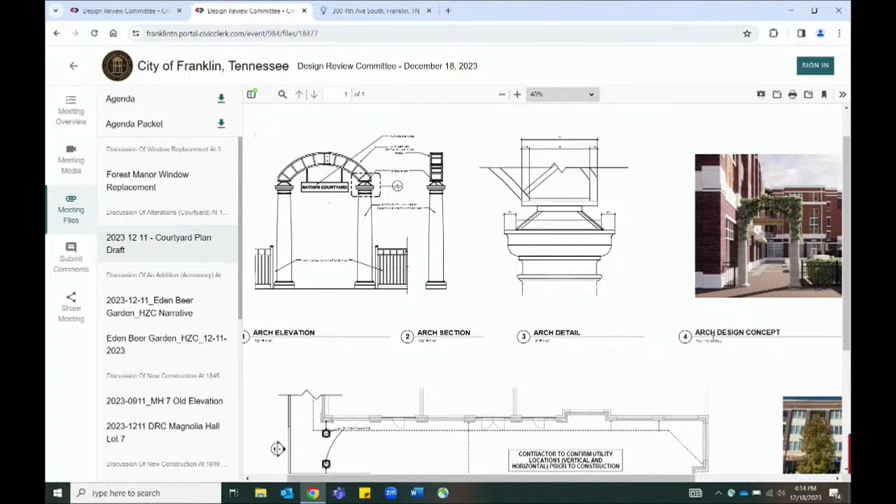This is to add an arched top over the columns installed on site. There are some existing photos, this is detail number 6 on our drawing. There are two photos of the columns as installed, and we are looking to add a metal trellis over those. Disregard the future signage shown, that was only conceptual for discussion purposes. I understand the signage is a whole separate submittal.

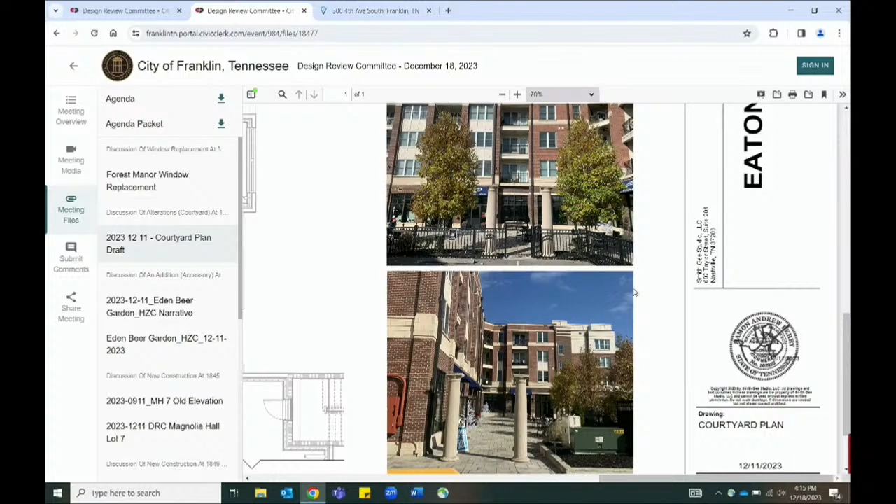The arch started off as a true circular arch, and we've flattened it to get closer to a typical proportion you'd see. It has a small plinth to take up for the flattening, and then it will be covered in vines, similar to what we are proposing at the AT&T box over on the side.

I don't know if there's much else to add. Steve, that's pretty straightforward. I pulled it from the agenda last time because staff was opposed to it, so I'll let them make remarks, but I do want to appeal to you on some of the design that we feel is important, and that's why we're back here. I want to talk about that.

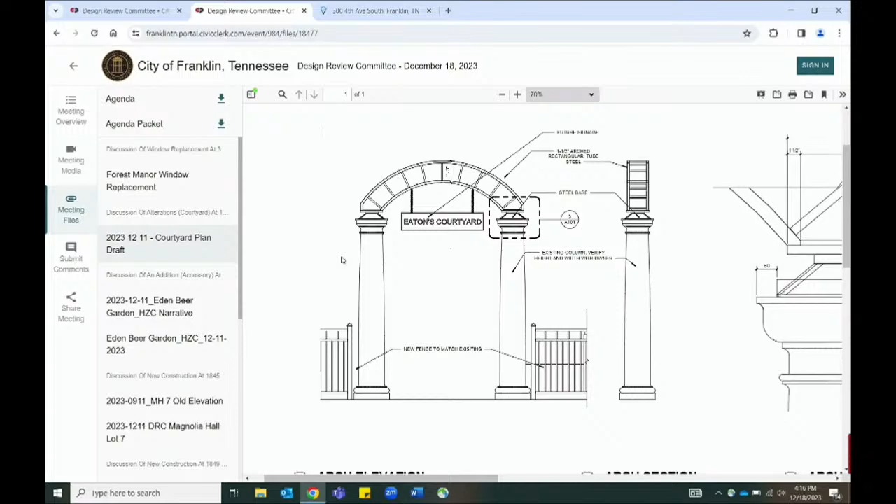We did get approved at one time on a flat wooden piece. It would drop our sign down below to about 7.5 feet. We want to brand this courtyard. We're a little surprised staff went against it. We thought the arch we got approved on the 30-foot wide driveway going into the hotel is in keeping with the historic district, there are arches there. We don't think it overwhelms, and the arch is our logo, so it's important. I understand staff's comments, but I would just have to disagree.

I think it's important, and one thing we had not done, because I had forgotten about it, is growing vines over the arch at the hotel, and we would do the same here. We would like metal fencing around that transformer. We had a wood fence and had an incident where a small kid almost got hit by a car, so we don't want that fence more than 4 feet high, but we want to grow vines around it and eventually up the arch. We're trying to brand it, so naming this courtyard is important to us, and I need that sign somewhere. We need to bring attention as much as we can to the retailers back there.

Thank you, Steve. Staff?

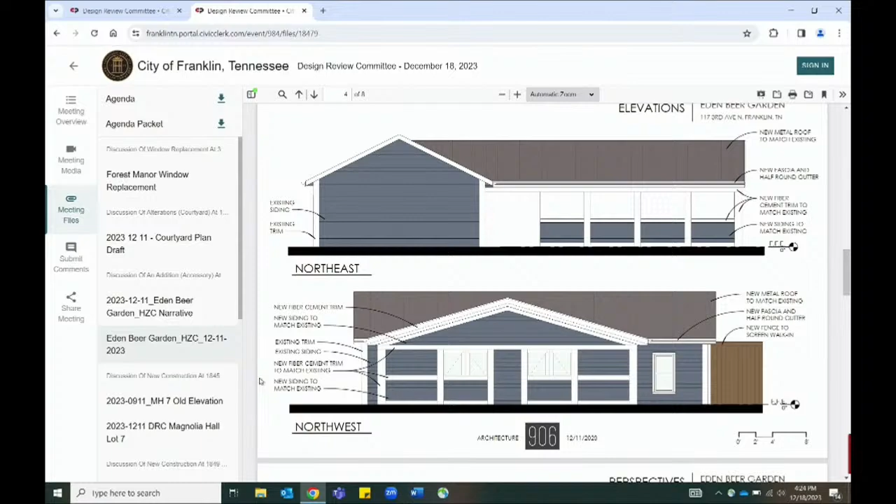By the street, I mean coming down 3rd Avenue. It's hidden back there. So that's what we proposed.

Okay, love to hear your feedback. Emily: So, I pulled up the National Register for this property, and it describes this structure as an early 20th century garage that's been extensively altered as a shop. Its facade has been retrofitted with circa 1980 single light, fixed vertical windows, and paneled doors. Across the facade is a decorative wood pergola feature. The exterior has vinyl siding, and it lists the structure and the principal building as contributing. As proposed, here are the existing photos and other existing photos.

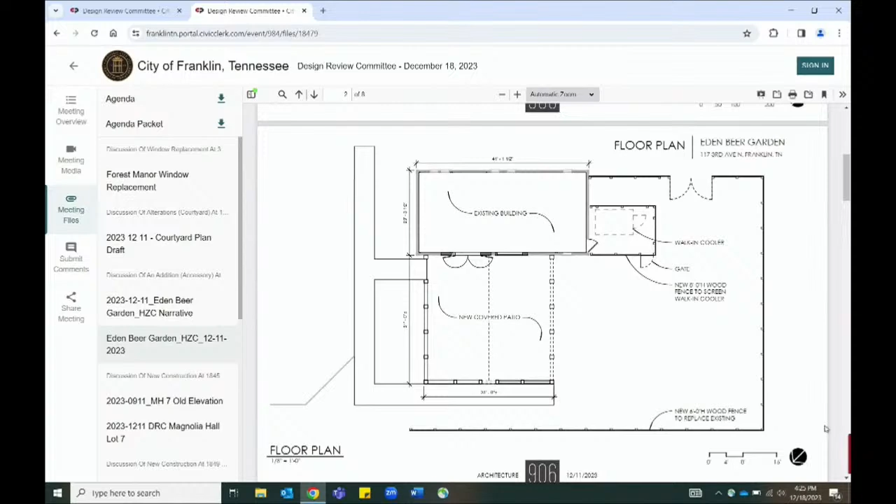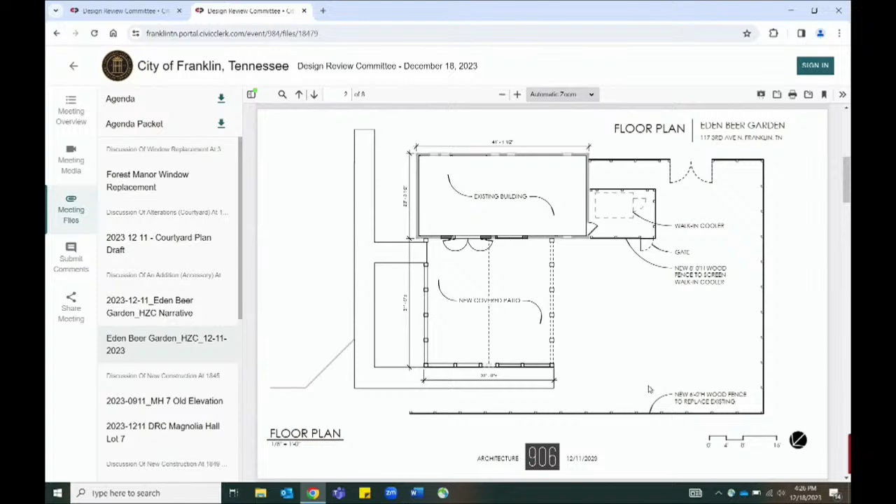Let me scroll to this. So this current square footage of the building is 831.94 square feet, and the proposed addition of the new covered patio is 961 square feet, which is 115% of the original building's footprint. Additionally, a site plan is needed to show the whole lot and the principal building's footprint in relation to this existing structure. Additionally, the guidelines do recommend utilizing a material so that there is differentiation, but also compatibility with differentiating materials.

Thank you. Commissioners, any comments? Want to go, Susan? Well, I think my first thing is I do appreciate that you brought photos of the building in front. That's very helpful. I am concerned that it is quite a bit larger than what we would typically allot for this type of building. That's my comment.

Josh: Okay, I'll go. I think it does feel—I know this building well because you can see it from that parking area, which I know is not part of the public right of way, but lots of people do see it. It does feel pretty overwhelming to that structure when I look at the renderings, just in context. I know there's not a huge space, or at least my memory is there's not a huge space between the back of the historic building and this accessory structure. Maybe I'm wrong there, but I don't remember it being very big. But I think a site plan will help with that.

And then my other comment is just from staff's perspective—if when this comes before us and we have the staff report, if you can make sure to speak to, because I know this is not conditioned space, but it is very large, kind of feels a little bit like a carport, but it's not, it's got walls, but they're half walls—how all that fits in with the calculations of the percentages. Those would be my comments.

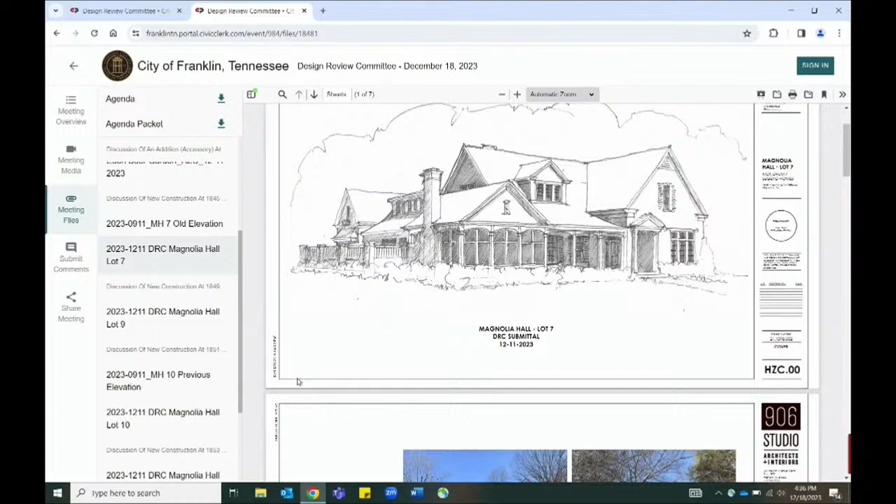It's going to be me. I messed up on the chair agenda. My bad. No problem.

So this building, I don't know why this didn't populate right on the packets, but it is lot 7, so it is directly across from Magnolia Hall.

Everything's working except that one, and that it's the O2 sheet. Okay, so nobody has it. Okay, okay, those are so large, but...

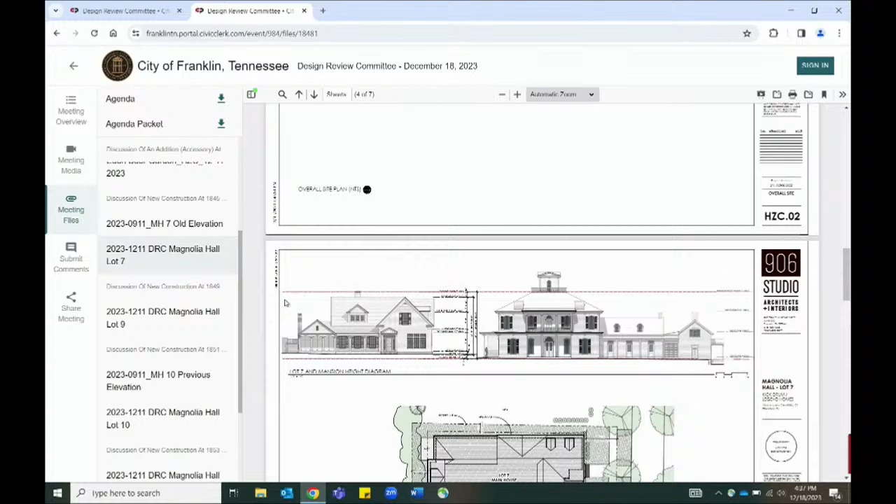Whenever you look at the aerial site plan, it is directly across from Magnolia Hall, and so we just wanted to comment about that.

Based on some of the inspiration images, it utilizes some transoms. We know that in several of the previously approved homes, the transoms have been omitted from the designs, but since it is appropriate to this architectural style and within the inspiration images, we just wanted everyone's feedback on the transoms that are in this photo.

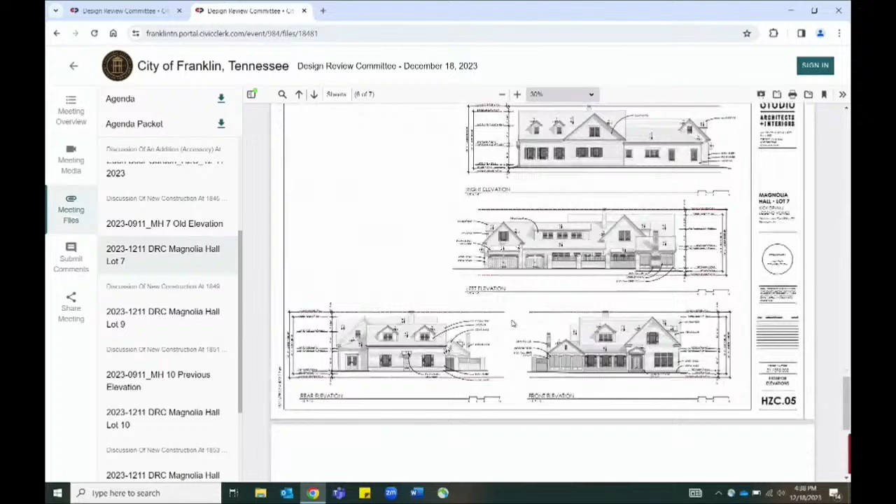Additionally, we wanted to comment on this left elevation, and next time it comes before the commission, can we have it be a little bit more transparent so we can tell if these are windows or doors? We believe this is a door, but we're wondering if you could do a little bit of transparency just so we can see everything.

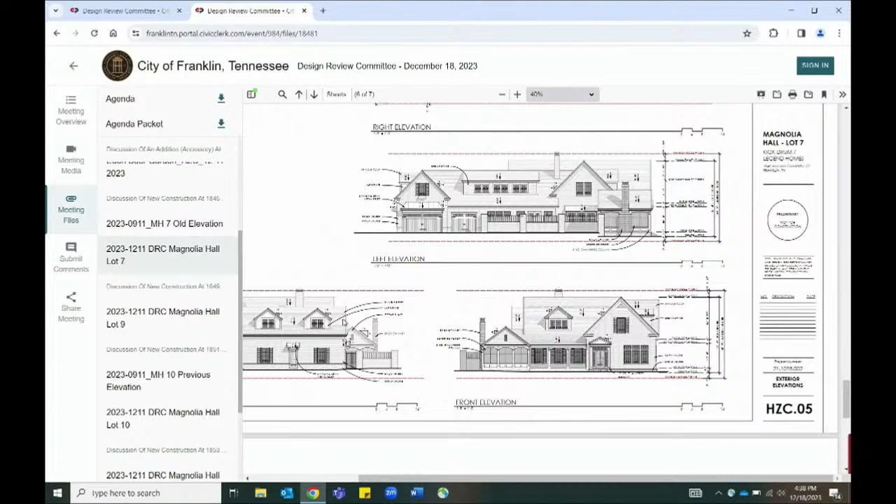And then the last thing we have is the chimney here on the left-hand side. The guidelines do say to have them be appropriately sized as compared to some of the other chimneys in the historic district, so we just wanted to call that out.

Thank you. Okay, commissioners. I'm looking at the front elevation and the portion to the left — is that a screened-in porch? It's reading as a screened-in porch. It's not that I dislike it, but we've never approved a screened-in porch, to my knowledge, since I've been on the commission, so I wondered how that fits with our guidelines.

I think the simplification of the project overall is much better, lowering the roof line and the different details. But the thing I'm having a problem with is, again, to my knowledge, we haven't approved one.

I did want to comment — we did not particularly look into whether we have. I know since my time here, we haven't approved any on the front. I will say that within their inspiration images, if they'll load for us, there are some examples of the screened-in porch. So I would say instead of a screened-in porch, maybe have it glassed in. I realize there's a cost difference, but before we moved, when we lived in Dallas, one of the things we looked at a lot when viewing houses was enclosed porches. The one we bought had the best enclosed porch I'd ever seen, and they had glassed it in, so it would still, in my mind, be contributing to the district. It really made all the difference in terms of me buying the house, quite frankly. But I think the feel of it really works with the house, though a glassed-in porch would be better.

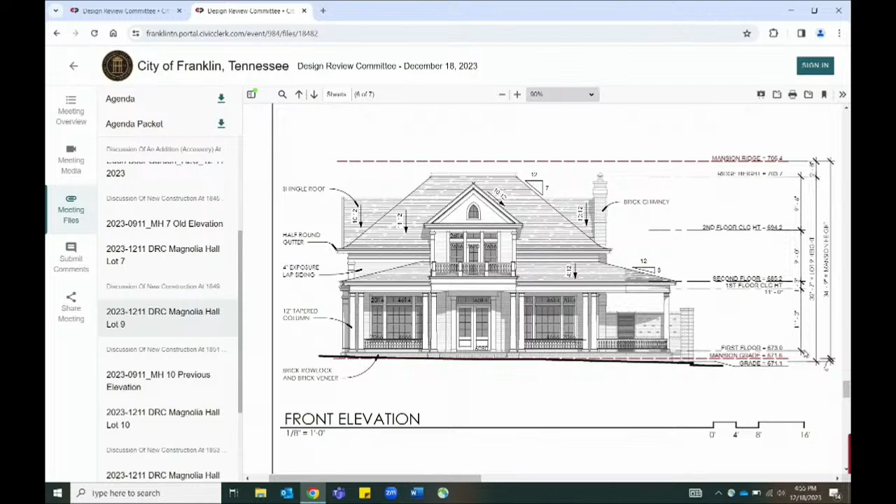Thank you. Susan, you want to start, or you want to start with Brian this time? You got voluntold. Thank you. I was going to start out with transoms everywhere.

Overall, it's right behind—we're talking about the one behind the mansion. Overall it's an attractive design. I do think we've saved these transoms for special features on the house, and on this one we've got special features in three places with transoms above the doors, the entrance doors. I'd like to see more consideration in that, especially on the porch portion. And those would be my principal comments.

Thank you, Brian. Josh? I don't have anything beyond that, other than yay for being even the chimney below height. Thank you, Josh. Susan, did you have some comments?

This is really referencing the Dozier House, which is one of my favorite houses in Franklin—I have a strong connection to that. And I think in this case the transoms do work. I agree, I don't mind the transoms. Too much of a good thing can be bad, so just be careful with them.

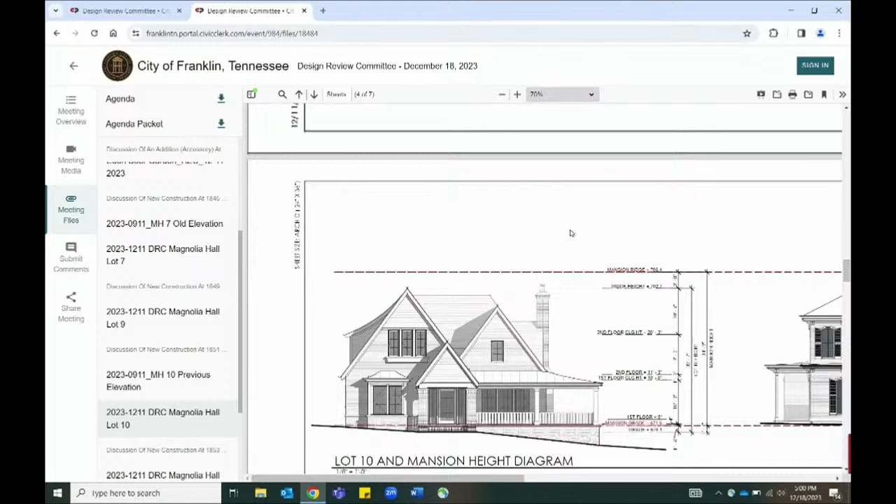For lot 10, the feedback from you guys last time was that you liked the design, but it didn't quite feel appropriate to this particular area. So we went back to the drawing board and re-looked at what the Tudor precedents were in Franklin, trying to design it more in keeping with those precedents as opposed to the two very formal symmetrical gable Tudor we'd presented previously. So this is addressing that feedback. Everything's lowered, so we're down in height on all of these. But appreciate your feedback on the new design.

Staff. I don't know, it's taken a minute to load. The computer must know it's a Monday.

So we have a comment about the windows sitting on some of the elevations right at the water table line. The guidelines would recommend, and the historic precedent is, that it's not common to have them sitting right at the water table line, that there should be a little bit of a barrier around it.

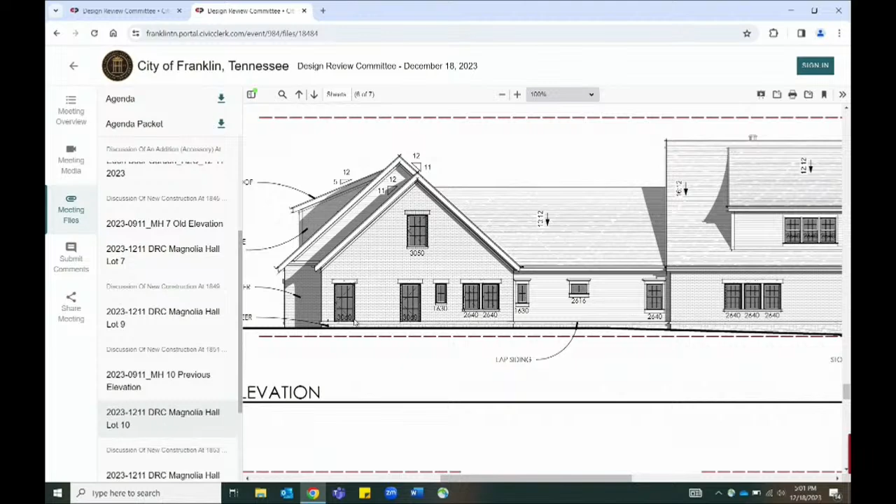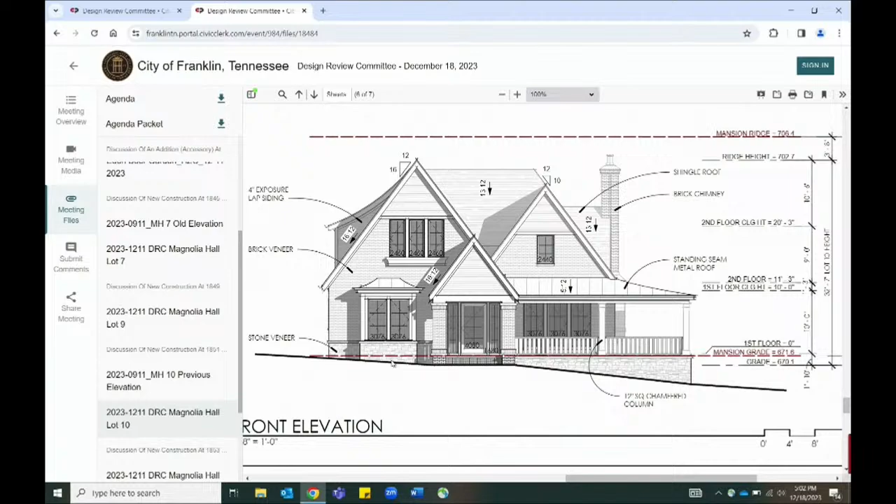Additionally, we wanted to comment on the front elevation. We did some research into Tudor, and it's not really common to find a whole bunch of wood elements. It's more common to find brick elements on a front porch. One of the designs we found utilized a kind of metal railing, so we wanted the DRC's feedback if there were differing materials for that. Additionally, on this bay window, it's not totally common to find a bay window on a Tudor, so we also wanted y'all's feedback on that. Thank you.

Commissioners, who would like to go first? I am concerned that the balustrade is wood, and that is not something you typically see on a Tudor. As for the bay window, if you look back in history at a historic Tudor, you would actually see an oriel window. So I'm not sure I see that as problematic. But I think the wooden balustrade just isn't working with all the other elements.

My only comment, not related to this one - if you look at your inspiration photos, the one in the lower left-hand corner is the home of my daughter's godfather. That front glass porch there is actually a screen porch with a glass front window. So there's an example, going back to our other one, although it's kind of a half and half. I've sat on that porch many times and I didn't remember it. But no further comments from me.

The comment I would have is about the gables. You've got wood siding in the gables, which takes up a lot of space in that area. If you look at your inspirational photographs, you'll see some half timber work, or stucco - you see a lot of that in Franklin in a Tudor style house, either the stucco or the half timber, and that might actually lift it up, take it up a notch. The other comments I agree with.

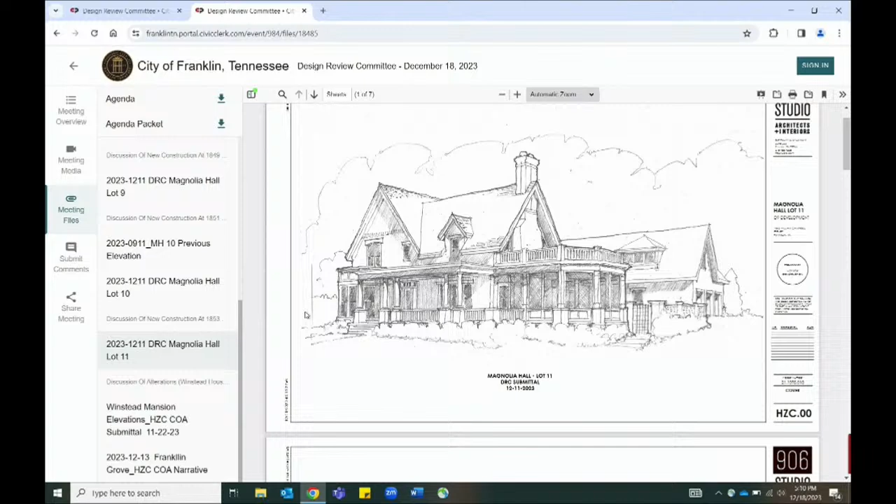is a little bit of a curious one. So we had, well, I'll tell you what we did first, and then we can talk about the other piece of it. We listened to y'all's feedback on kind of simplifying some things back. This one still probably is not going to be as simple as some of the other ones, just by virtue of where it is in the development and kind of what we want it to do. But I think given how far away it is from the mansion, we felt like that was an appropriate design choice. But we did pull it back significantly and reduce the height just a little bit from what y'all had previously seen. Also just kind of cleaned up some of the massing to respond to some of the comments that y'all had made.

The other thing that has come up, so that's kind of where we were with the submission. We got final grading numbers based on what they're doing out on the site end of last week. And it looks like we actually are going to potentially need to raise the finished floor height on this about a foot and drop the garage down to make that work because there's so much grade fall across the site. So this may change just a little bit. I don't know if you'll want to see some very rough massing stuff, if that would be helpful or appropriate to this conversation, but we didn't want to sort of change it completely without being able to talk to y'all about it first, knowing that that's coming if we turn around and resubmit this.

But we would still like feedback on the aesthetic, as well as some of those height questions. Sure. Staff?

So this is lot 11, and this one is the last one on the cul-de-sac. But it is the first one that you'll see on 96 and whenever you turn on Boyd Mill. So there's an importance on all the houses, but especially this one.

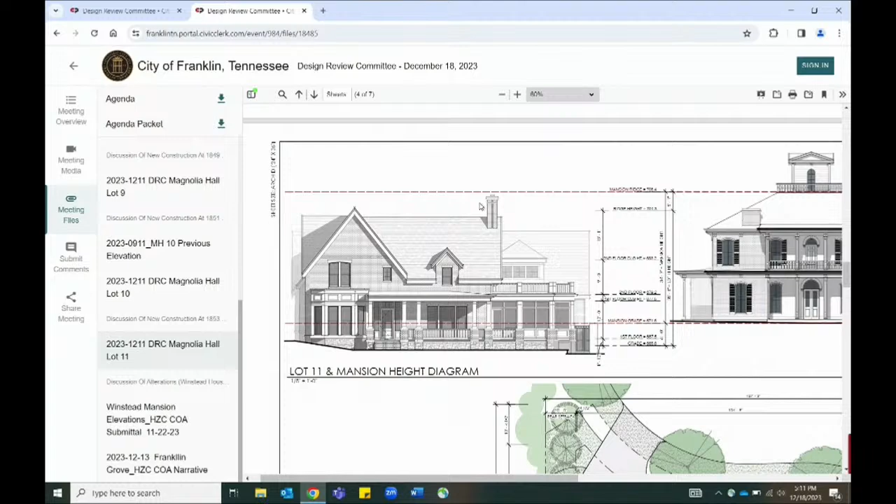I did want to call out that while the height has been decreased a little bit, it is still 35 feet 8 inches, and the mansion's height is 34 feet 9 inches. So we recommend that it should be diminished just a little bit more, so it is lower than the mansion. Also wanted to call out this wall dormer here on the front facade.

The guidelines recommend not to utilize wall dormers. On this front facade, we have a grid pattern in this one window, and then the rest of the windows do not have a grid pattern. And then there's an arched window above the bay window.

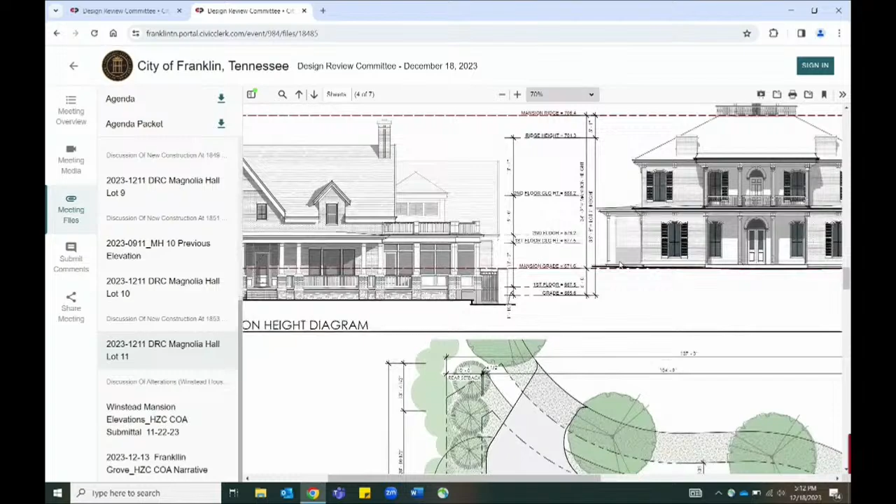Additionally, there should probably be a little gap or some brick on the other side of this bay window, just for symmetry. I believe that the same comment about the windows being up against the water course is applicable to this. Yes, so it sits at the water course line.

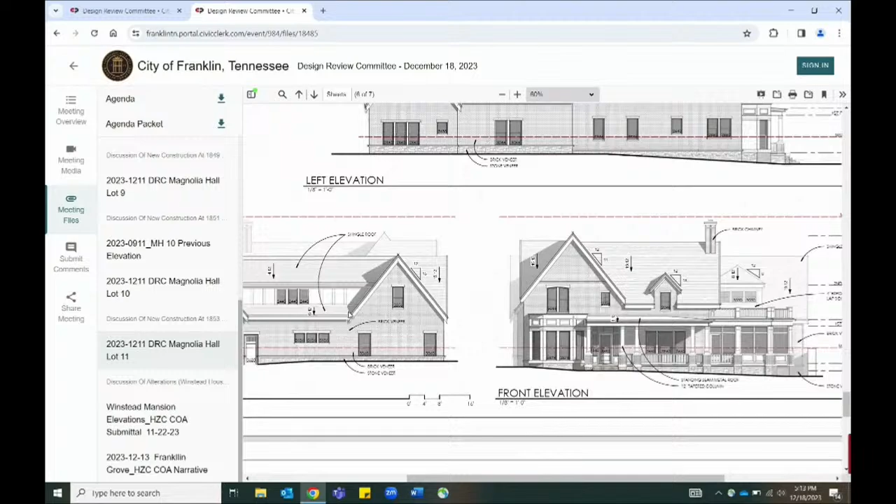That's it, thanks. Okay, thank you Emily. Who would like to go first? Ms. Besser? I have just a couple, I would just concur with what Emily has to say. I do think the bay is probably a bit more prominent than it needs to be. It needs to be reduced a bit.

Are we looking at another screened-in porch? Yeah, so I would have those same concerns about that. And then again, I think just really - glass? It's glass. It is glass? Okay, glass, thank you.

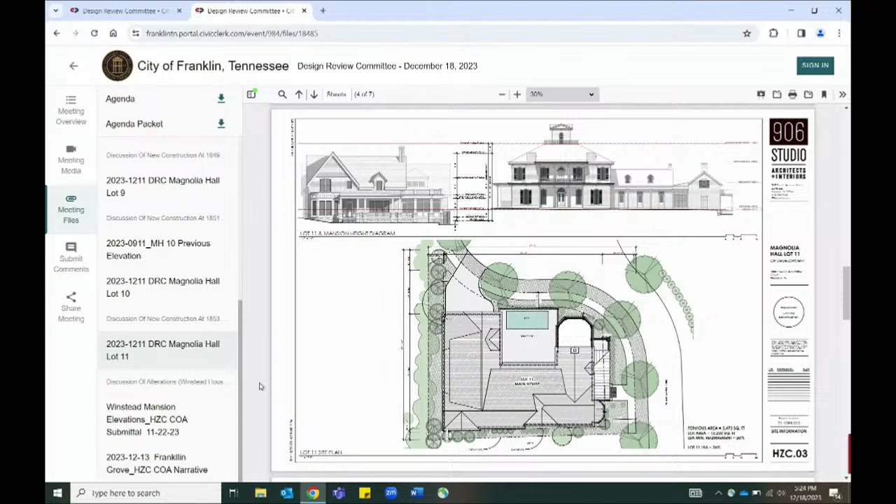Yeah, I think I've said before that I'm not totally against wall dormers, but it is a mechanism by which we try to discourage people from using 4, 5, 6 foot knee walls. So again, it's one of those kind of self-imposed things. It's like, well, if that's hard to contend with, don't have a 5 foot knee wall on the second floor. And all that plays into, well, we also have to have a roof line that fits a certain height, and the only way to get volume up there is to do this.

So there's all these competing aspects to that. I think in limited use cases like this, it doesn't bother me. That dormer doesn't bother me at all. But I think the rule is there because, is somebody going to go on the back of a house and just extend the back wall and do a shed, and that's a wall dormer. This is a wall dormer too, but I'm not going to say it's not tastefully done.

I think it's okay. It looks good on this house. Of all the issues we've talked about that I have with the front elevation, that's not one of them. But the guidelines discourage them because, where is the line for the next person? And I don't like the word precedent because every project stands on its own, but where do we tell people, oh, now it's too big to be an acceptable wall dormer? So the guidelines read that we don't encourage wall dormers.

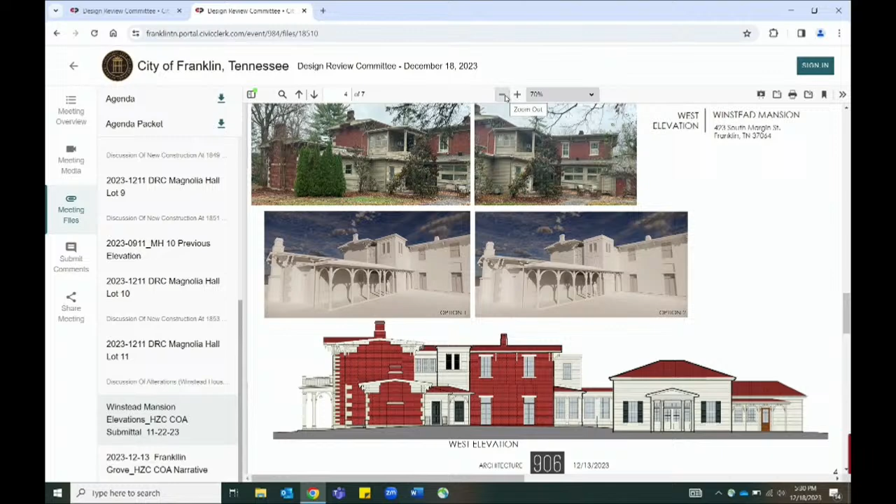Ask you guys if you want. We gotta wait till they talk first. You introduce all the parts, and then Emily will go. We'll come back to it though.

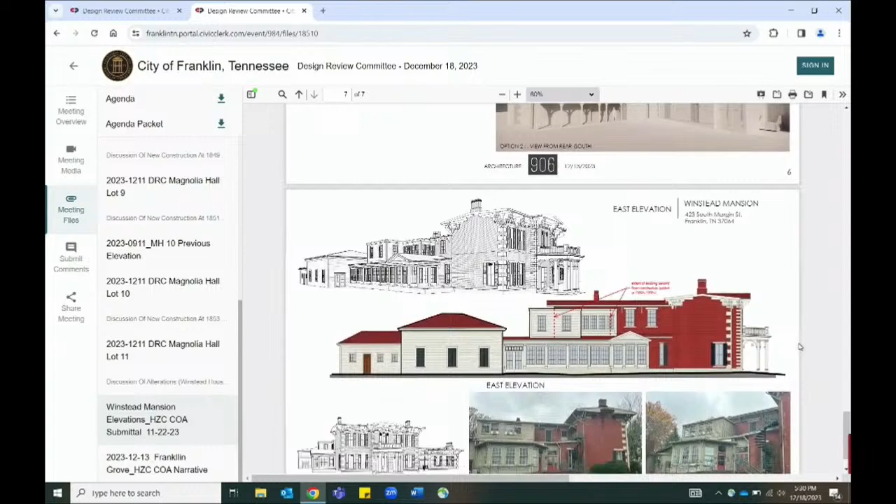I've got notes here. The second piece is the back stair. To provide context for how we got where we got: as previously designed, the stair was up against the historic house. We moved it out away from the house, functionally to provide more space, but also from the standpoint of the historic house. I can't remember if this is within the local guidelines, but with this project being on the National Register, it comes under the state guidelines, being reversible is something that's on that. With the position we've put it in, if the stair had to go away, it would impact the existing house the least. It also allows that existing wall to be a feature within the house. There are also historic small double doors down low that, with the stair as previously designed, would be covered up. Now, from the other side, you'd be able to see them, but they wouldn't be operable. We'd have to cover those because that stair has to be rated.

Oh, sorry, can you start over? Does this drawing reflect that, because I'm not seeing it. This drawing reflects the current proposed design, not the previous design that was approved. So I just wanted to provide more context for why we're proposing to position the stair differently than what's in the approved design.

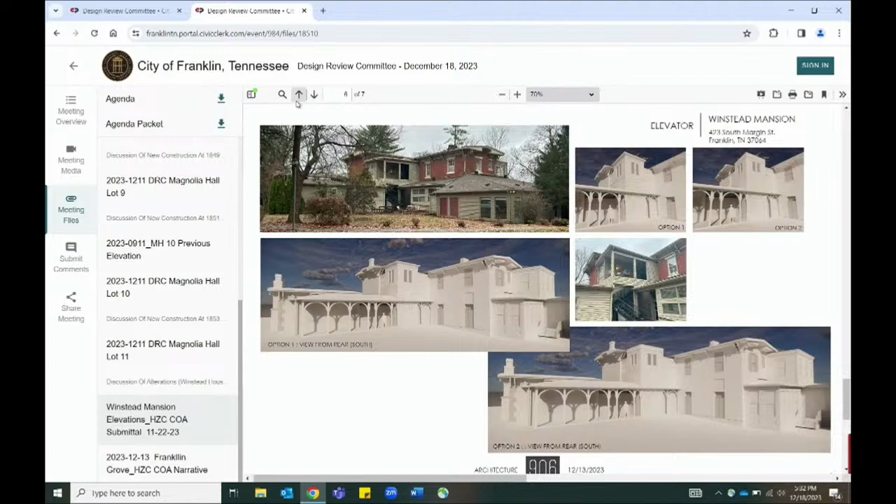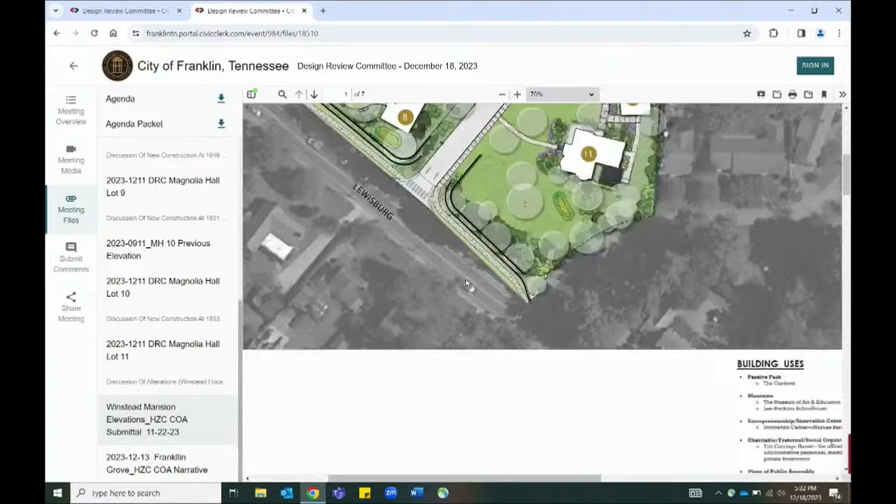Ready for staff? Go ahead, Emily. We really appreciate you taking the feedback from the past meeting to reconfigure the loading door to the side, so it's not on the front elevation. We think that aligns with the guidelines, and since there was a lot of discussion that the front facade should remain intact, great job.

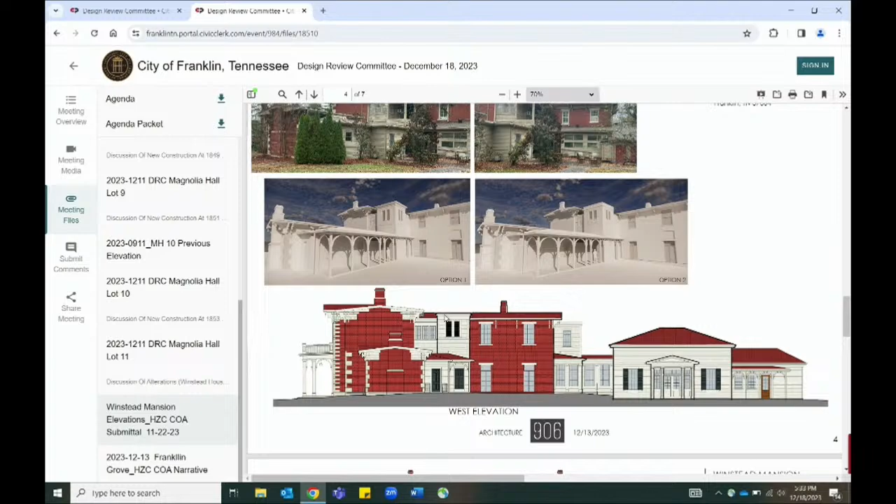Then going to the elevator portion, are both options below the main form? Yes. Okay, that's what our main concern was. The guidelines recommend that it should be a lower form, subordinate to the historic home, so both options meet the guideline for that. Good.

Then for the stairs, I just wanted confirmation that if you're looking at the very front of the house, the stair addition will not protrude from that. It does protrude out the side, but it's about 60 to 65 feet back, so the piece behind that space protrudes as well. But with it being that far back, we felt visually it has less impact. It's okay if you don't know off the top of your head, but how much does it protrude? About 8 feet. Okay, alright, thank you.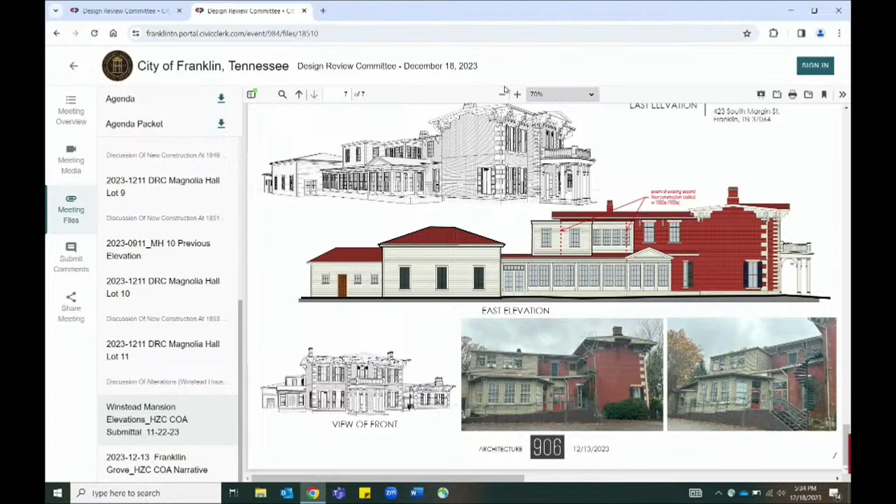Would you like to start? I will start. Okay, so here's what I'm having a problem with.

I actually checked with one of my instructors earlier today. This solarium has a good bit of age on it. I started there in 1979, and she was one of my instructors, and we remember it being there then. So we're creeping up into 50 years for that solarium. We're taking out that solarium, and I'm having a problem with that, because I feel like it may not be 50 years old, but we're creeping up into that time period.

To clarify, that's part of what's been approved, not proposed? Correct, it was approved for that little solarium portion, to be demolished in October 2022. So I guess I can't do anything about that.

So I guess I'm having a problem with the whole thing, because I think it's still going to be pretty prominent from the street, and that solarium was kind of tucked back in there. Yes, it did project out some, but this is going to be pretty visible from the street. That's my own history, but I think I'm having a problem with the addition to the left.

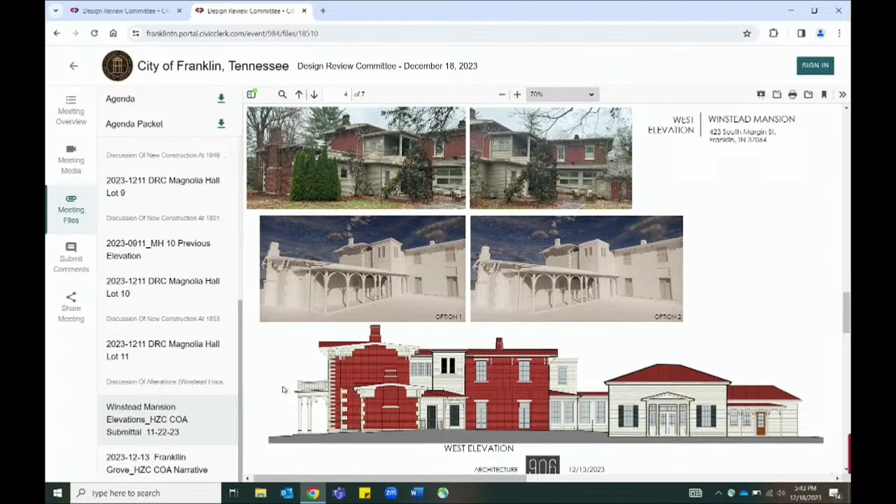I don't know what to think about this stair. I don't like it sticking out the side. I don't think that supports what the guidelines recommend in terms of this kind of front silhouette thing.

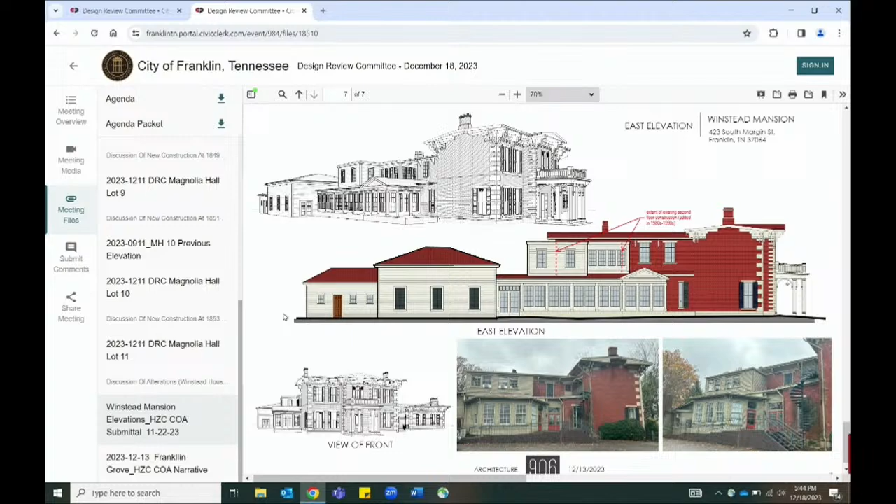I know it's a long way back, but what's different about the building that's protruding back is it's sort of connected with what kind of looks like a breezeway. I know it's not, but from somebody on South Margin it's going to look disconnected, like an outbuilding. Until you get up close, you don't know that it's even connected. This looks like the second story of the house, and you're not going to have a perspective to know it's not part of the house until you get back there.

So I feel like the table's flipped, in terms of that main mass sitting on its own—we can kind of see its corners and edges and the hip and the roof turn. This is a little different because you've got this office mass that's been there for a long time.

I taught here, I was interviewed in that little cube, so I know that room well, and you're extending it—the office is part of the extension and the stair. I hear what Brian's saying, can it just fit in that box that's already there? And the answer is, yeah, it could, but you don't get your offices then, either one of them. So I know you're looking for some square footage.

I don't have a solution for you except that this doesn't necessarily meet the intent of the guidelines because it's just visible from the front. We may not have ever approved the first box if it were to have come up. That's been on there for a long time, but if that were to come as a new design and we just had this typical I-shaped, or I always call them T-shaped house, we would all be aghast that anybody would add a box on the roof, a straight up box.

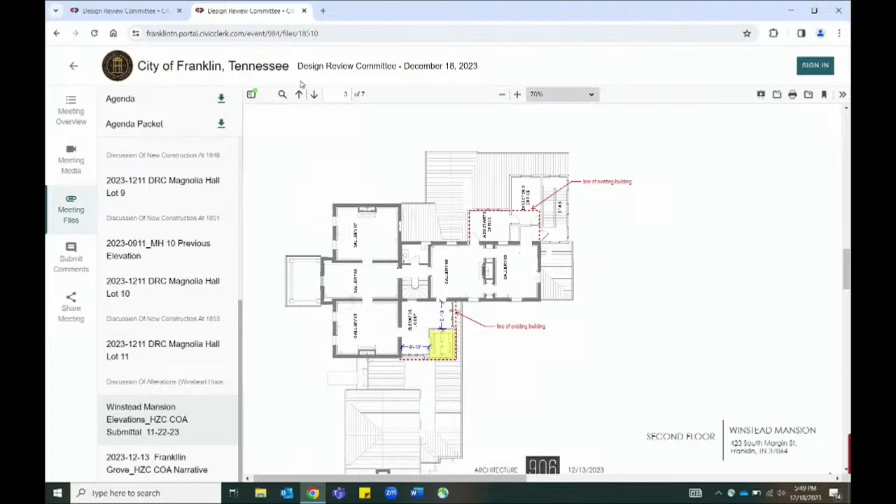And that's where it was originally proposed, the approved design, previously approved. And that box has been there quite a while, before your time there. So there's an old box there of some sort, utilizing that space for the stairs. I'd assume that was going to have to be rebuilt—just what you'd do to put a stair in there—and it's got some disrepair issues. But it would go back within that mass. Probably got a lot of disrepair issues. Couple.

But anyway, that would be my suggestion. Yeah, and I keep looking at this knuckle on the other side of the house where the elevator tower's going. There's a lot of building there now, which isn't showing up here, but there were classrooms there with little gas heaters and all kinds of weird things in there.

That's a more public side of your building because the gardens are over there, but there's some mass to hide behind it. It may make sense to look at tying all your vertical circulation together over there.

I don't know what that does to your travel distances and dead end corridors, which is why this stair's here. But I'll let you all deal with that. Consider where else it might fit, because I just don't think this supports what the guidelines call out.